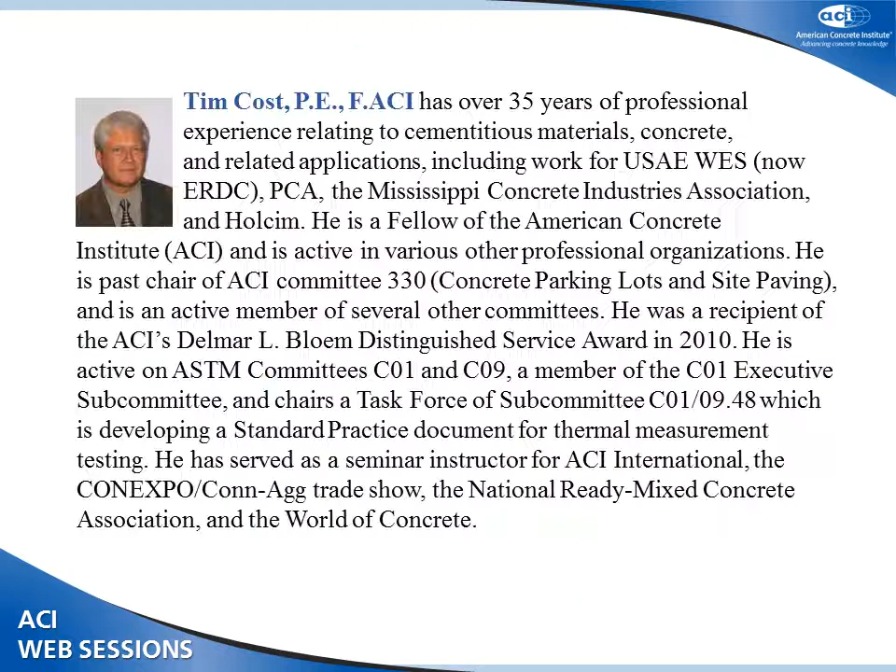With that, we'll move along to our next presenter, which is Tim Cost from Holcim. Tim, if you'll join me here on stage, and if everyone would welcome him, please. Thank you.

Well, here's some cement guy wanting to talk about chemical admixtures. This should be good.

It's true that chemical admixtures are a very important component of how we might go about developing highly sustainable concrete mixtures. I'd just like to suggest an approach that may be useful in finding the right proportions and optimizing the performance of certain types of highly sustainable concrete mixtures.

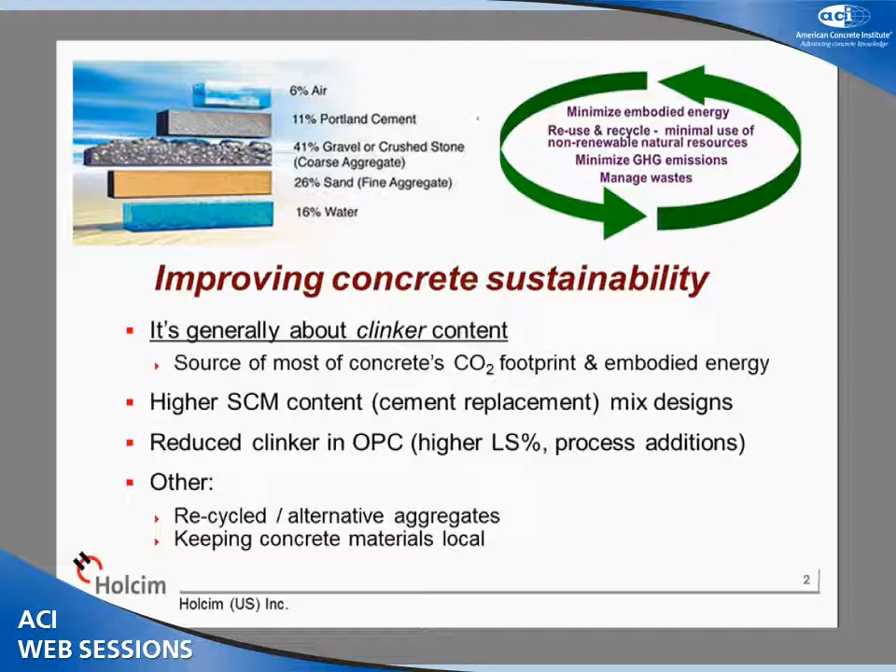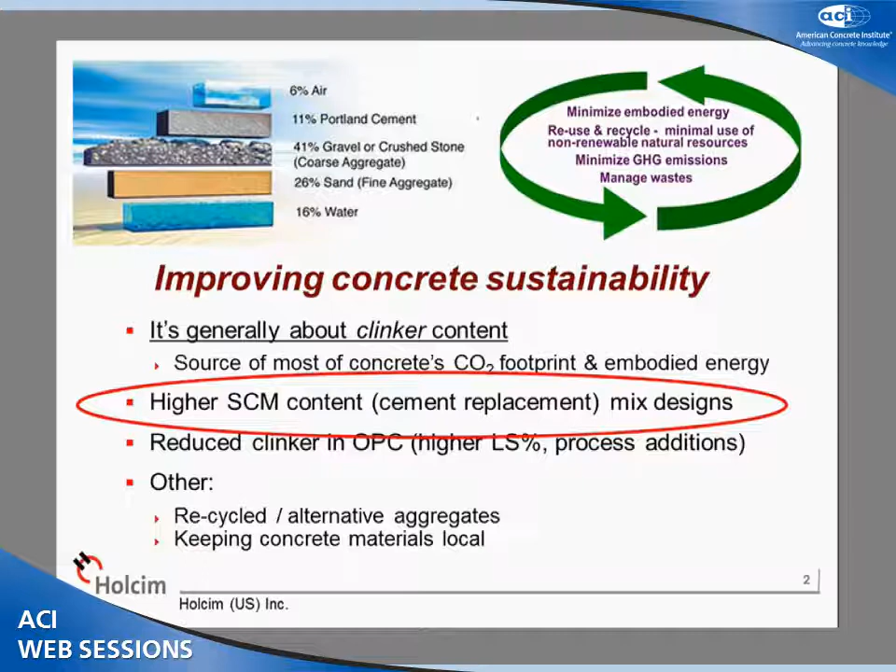When we talk about sustainability and improving the sustainability of concrete, many times it's all about reducing the clinker content of our concrete mixtures with available technologies today. As we do that, the reduction of Portland cement use through supplementary cementitious materials becomes a very important part of that. More and more, we're running into concrete specifications and even project owners who want to require of us higher replacement of ordinary Portland cement with supplementary low carbon footprint materials.

There are a number of very celebrated projects in recent history that make significant use of SCMs in concrete. The I-35 bridge in Minneapolis is certainly one such project with some very impressive numbers on replacement of Portland cement for high performance concrete. But unfortunately, not all projects are as conducive to the use of such mixtures.

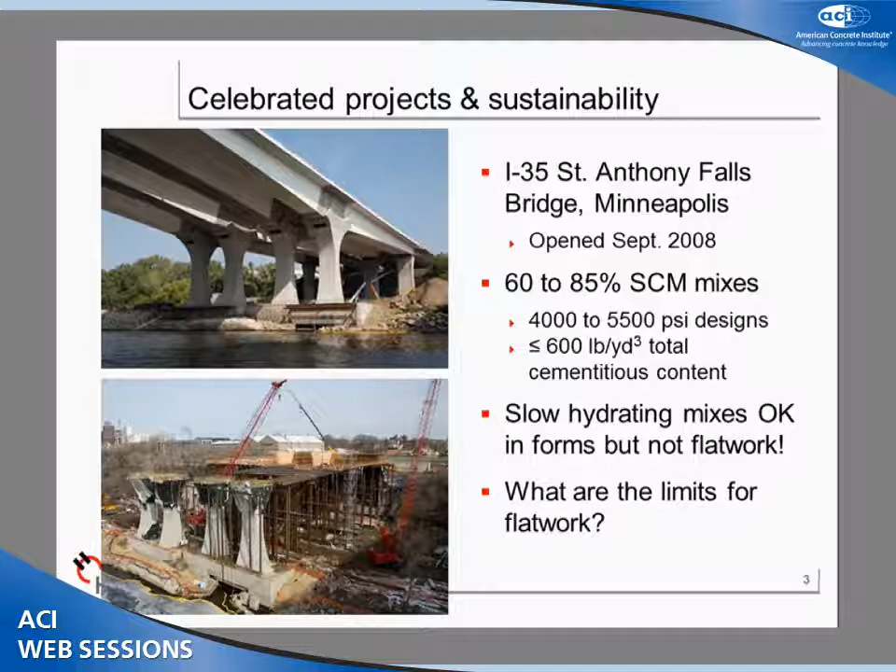In particular, projects that may require a lot of flat work. Finishing of flat work for floors and pavements and so forth require certain aspects of performance that seem to be contradictory with the use of extended levels of supplementary cement materials.

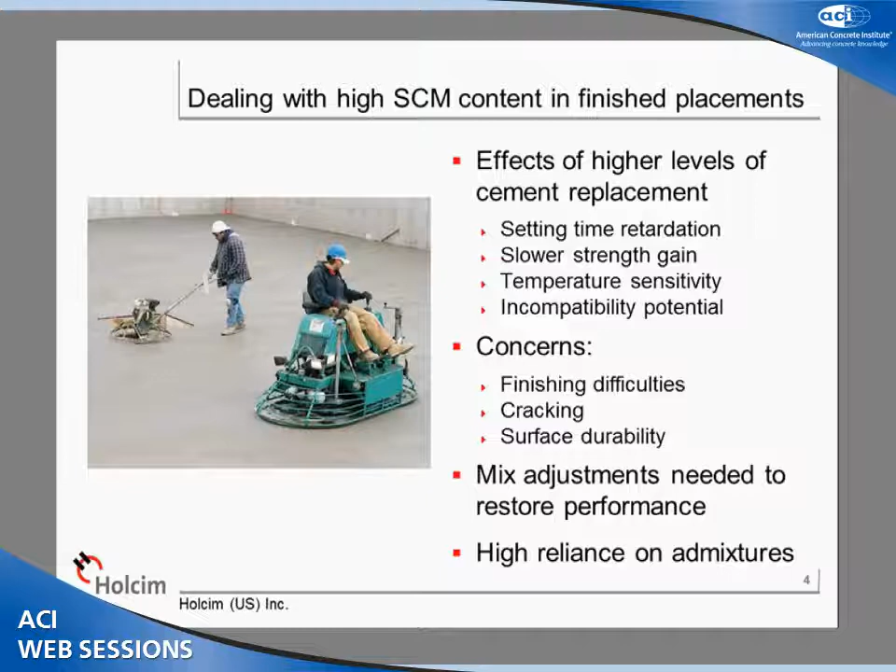And the related performance trends that are problematic are certainly set time retardation, very slow strength gain of the mixture, and so forth. And of course, the potential of problematic performance with cracking and surface durability issues becomes more and more significant as we slow hydration rates and extend setting times.

So one thing that's been found to be problematic whenever we're mandated to go to a very high level of supplementary cementitious materials is if all you do is simply increase the replacement rate of your fly ash from 25 to 50%, you're probably going to have some performance problems on your hands.

So this might be a protocol that might be of interest in the next few slides here in restoring acceptable performance. And these are the related challenges.

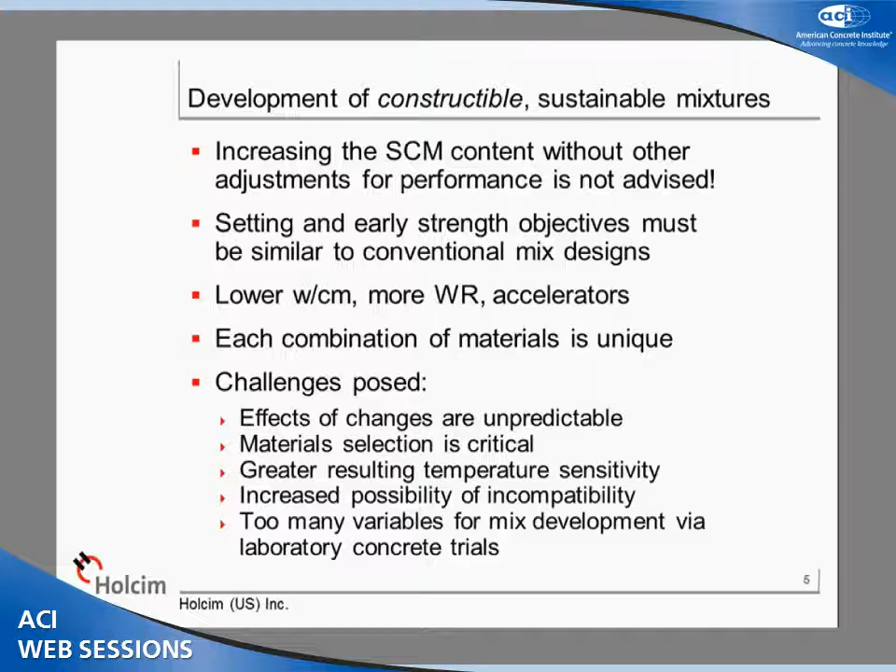As we start to use more and more chemical admixtures to accomplish certain things in our concrete mix, the complexity of this mixture becomes significant, and the predictability of those results, particularly as we change from one job to another, material-specific sources to others, we really need to be able to develop mix designs based on specific knowledge of specific material combinations.

So what I'd like to suggest is the use of what we are referring to as thermal profile testing or thermal measurement testing. It's a very expedient, quick and dirty tool for preliminary performance, achieving performance attributes of interest in a concrete mixture.

This type of process is particularly suited to evaluating setting time influences, early strength and relative hydration performance, evaluating the possibility of any potential incompatibilities, as Ara mentioned earlier, and these kinds of things.

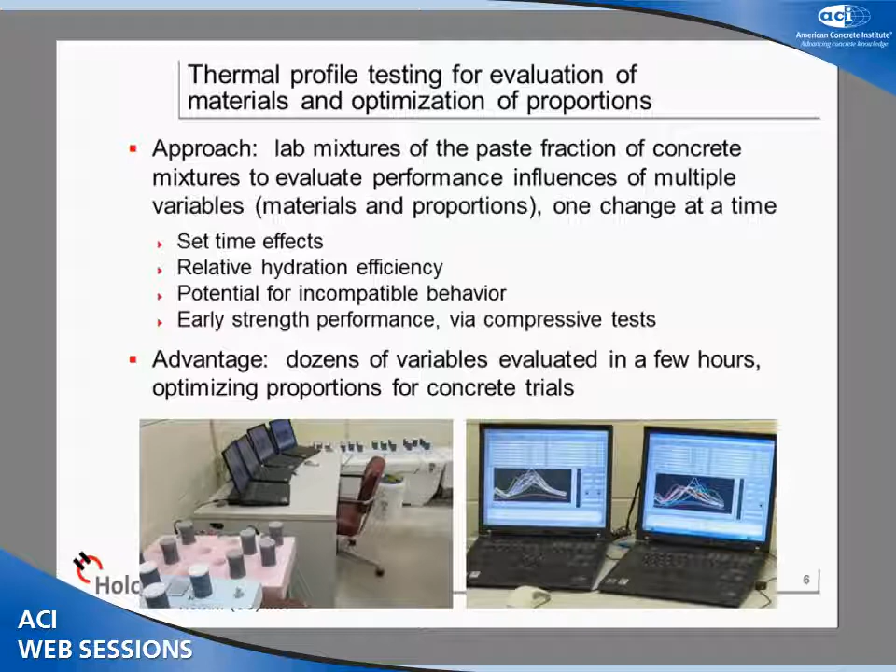Now, this type of protocol is made possible through the use of very inexpensive and easily used temperature collection devices that you can buy commercially and actually apply in various types of expediently devised setups for testing.

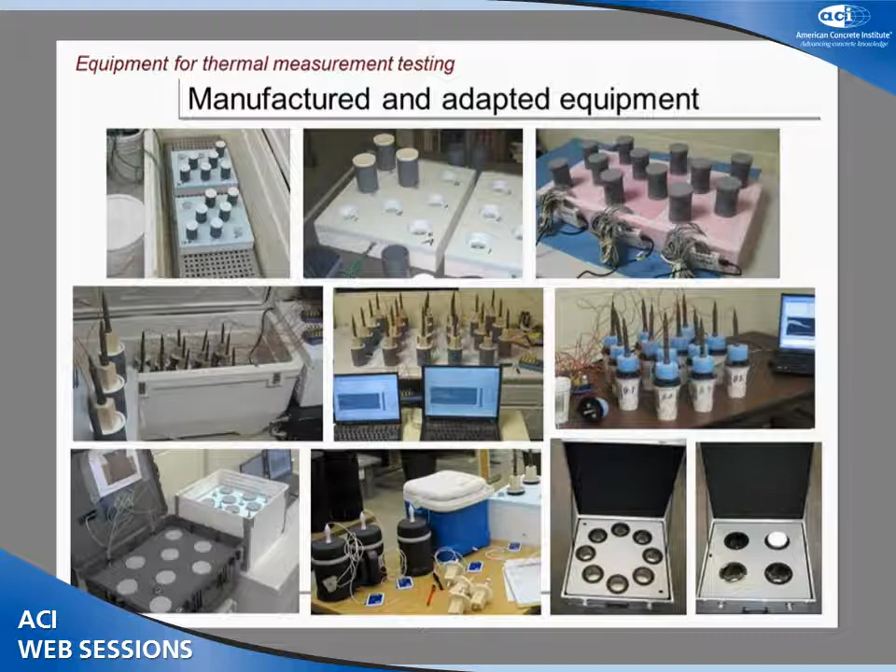There's even getting to be some commercially available thermal profile testing devices, such as the adiaCAL type field calorimeter. This is one that Holcim is now producing in Europe that is being used internally, and a variety of other adaptations. I'll show you a few more of those as we progress.

What I'd especially like to concentrate on is the use of laboratory paste mixtures. Very quick and easily executed process in which we actually model the paste-only content from your envisioned concrete mixture. No aggregates, just cementitious materials, mixed water, and chemical admixtures. This is a very convenient way to understand the effects of different chemical admixtures, their dosage rates, and their interaction with particular materials of interest.

And the equipment used is very simple and easily acquired. It's a routine thing. What we do is pre-weigh the powdered ingredients.

You see some containers, plastic containers of pre-weighed powdered ingredients. As we're doing the mixes themselves with very simple mix equipment, we're actually batching the mixed water individually for each mix and weighing that up on the fly. And we use medical syringes for the proportioning of chemical admixtures.

This also lends itself, if you're interested in investigating delayed admixture addition routines, to modifying your mix protocols. Doing this, two people can easily do 3, 4, 5 dozen mixtures in a morning. It takes us about 4.5 to 5 minutes a mix to put these up as we go, so it's very simple to do.

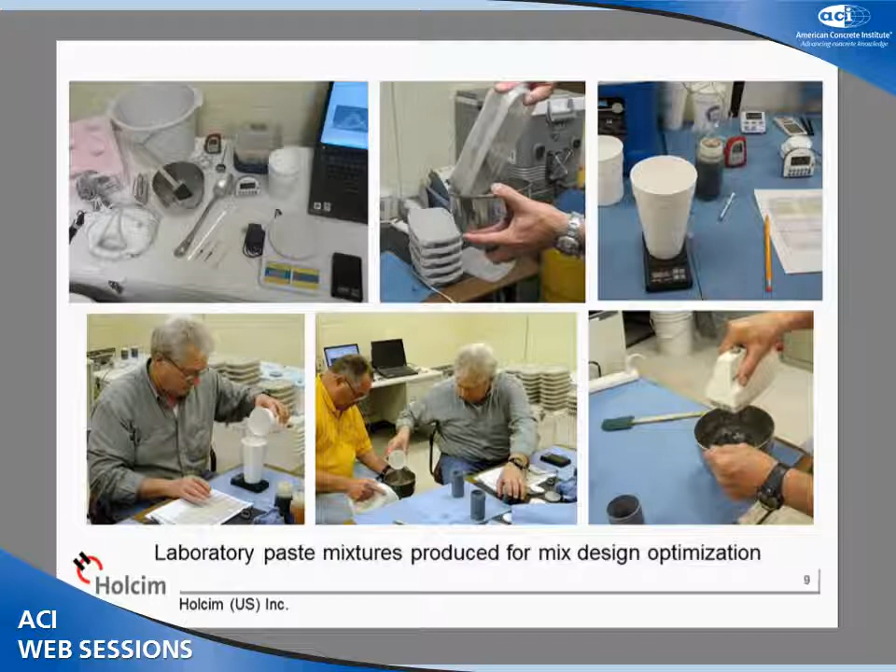These are the actual pieces of equipment that we use to produce the data that I'm about to show you. We often use a curing tank preset to a particular concrete field temperature of interest for preconditioning materials and the hydrating environment, to see what might happen at summertime temperatures in the field or even cooler temperatures associated with fall and winter.

Just a quick review of what happens in a thermal profile, in order to see how we use this information and apply it to concrete mix performance. This is a changing state of temperature of a hydrating mixture over the first 16 hours in this case, very typical.

The features we're interested in: first, the aluminates, the calcium aluminates in cement, fire off a lot of heat evolution immediately, which is then very rapidly controlled, if everything is ideal, by the interaction of calcium sulfate or gypsum in solution. That provides us the delay period for finishing concrete and so forth.

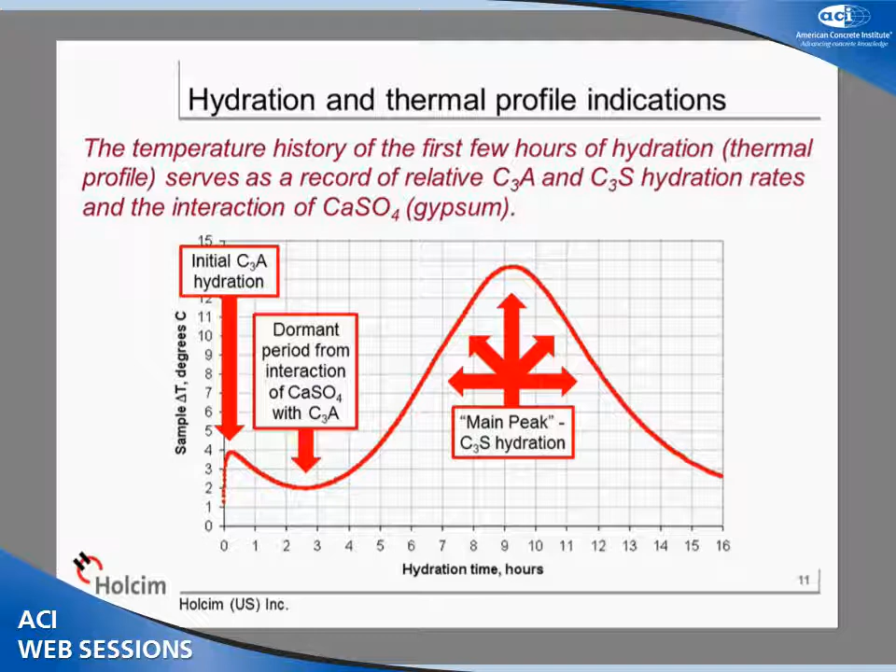Then the main event occurs, which is the calcium silicate hydration that produces setting of concrete and ultimately the early strength of concrete. We know from experience that in this history of events, the initial setting of concrete probably occurs in the neighborhood of that timing in the sequence.

This is actually quite repeatable and has been found to be a useful tool for even estimating concrete setting times from such mixtures. A convenient reference might just be a point halfway up the onset of hydration from dormant temperature to peak temperature. It can be done visually or in a spreadsheet, and we use that as a reference indicator of approximate setting time changes from one mix to the next.

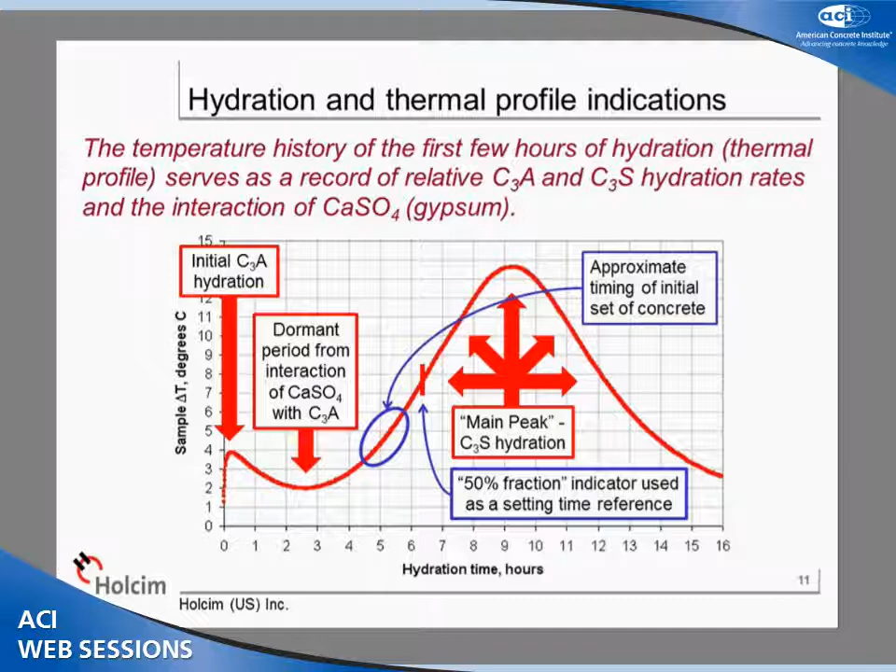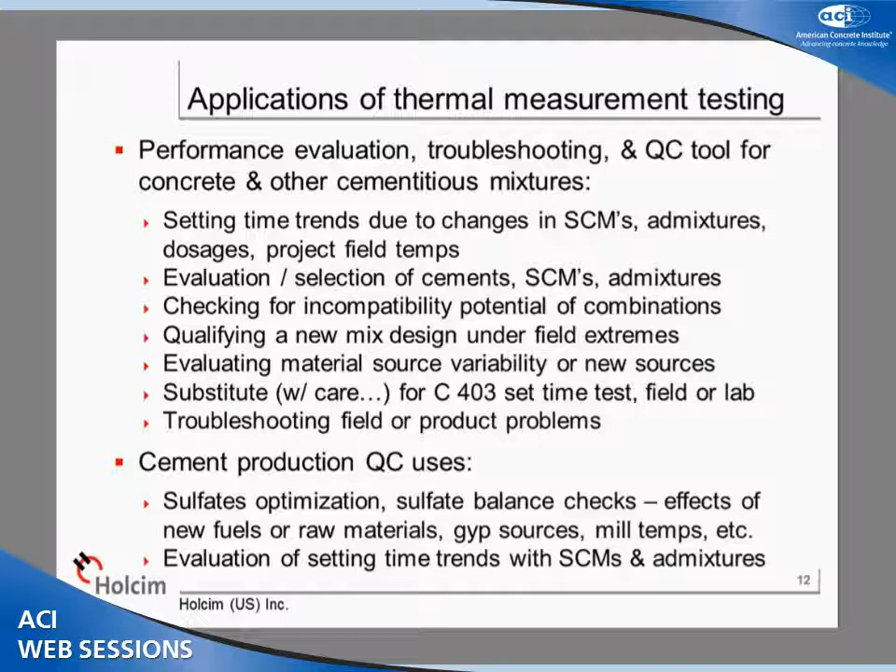A lot of different applications of this technology. The specific uses I'm going to suggest relate to how we can model a concrete mixture that is performing well, and then use the same testing techniques to investigate different proportions of other materials to reproduce that performance.

By the way, this is sometimes referred to as calorimetry, but to be clear, that's a misnomer. Actual calorimetry is the very precise measurement of actual heat evolution from a hydrating sample. We're crudely documenting the changing temperatures of mixtures as an indication of that heat evolution. But loosely, if you call this semi-adiabatic calorimetry, we'll know what you're talking about.

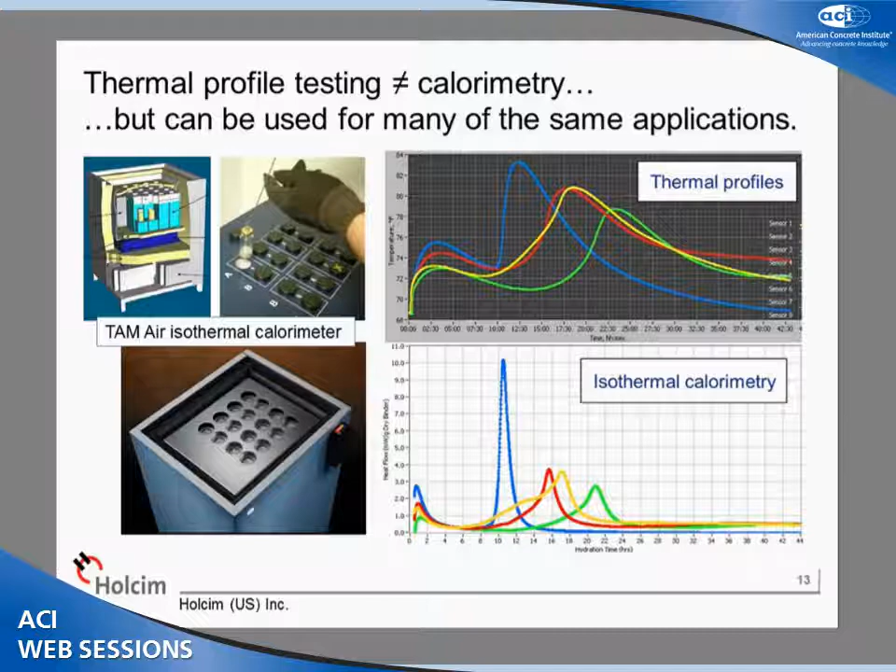Very routinely done. Another interesting thing to do is document the one-day strengths of these mixtures. In an absolute sense, the shape of this curve, while it doesn't change for a given set of materials, may actually be somewhat related to the quantity of strength produced in the evaluation period, but that's a very difficult thing to evaluate in the absolute sense.

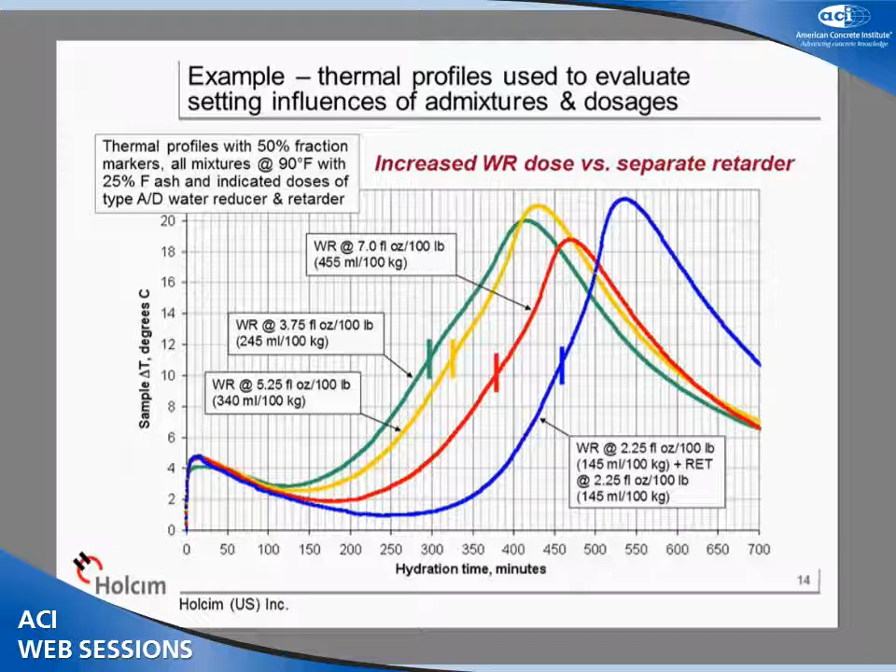So it's also very simple just to take the same hydrating samples, whether paste, mortar, or concrete, and do a one-day compression test on them to see what the relative strengths are.

The subject of incompatibility has been suggested, and this is an excellent way to investigate and evaluate the potential for a set of materials and proportions to misbehave or abnormally hydrate. We see those things happen when the shapes of the curves change, and the one-day strength documentation is particularly useful to help us assure our interpretation is correct with respect to strength generation.

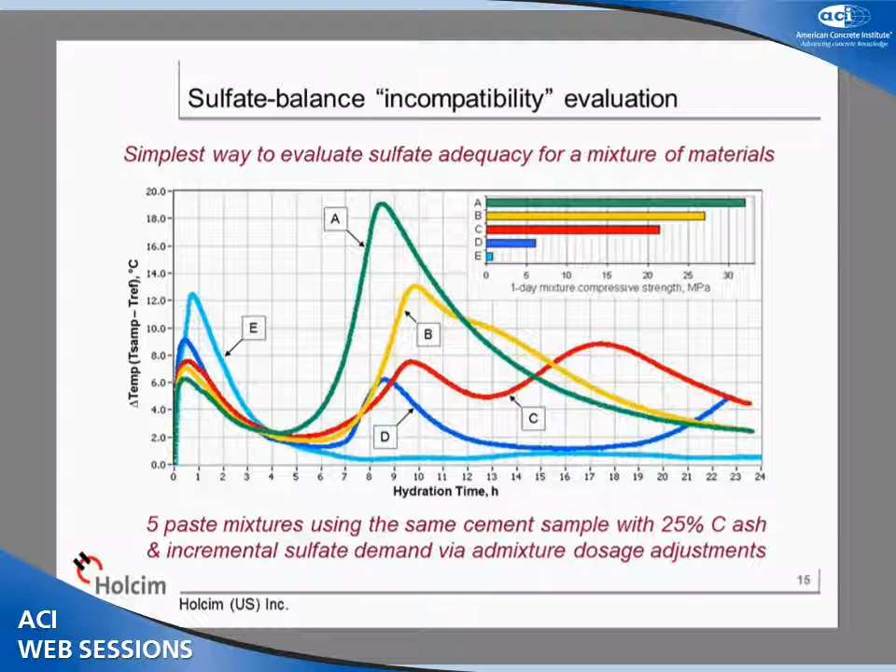This set of mixtures was exactly the same proportions and materials with the exception of admixture dose, which was incrementally changed in an aggressive mixture at summertime concrete temperatures. You can see in the case of normal hydration, the green curve, the strength produced at one day, all the way to the most extreme case for the most incompatible set of conditions, which produced virtually no measurable strength in one day and would have been a very unusual setting time trend.

These incompatibility occurrences are driven by a variety of things, but principally certain SCMs. Again, if we're developing sustainable mixes, this is of particular interest, particularly Class C fly ash, which may contain significant aluminates.

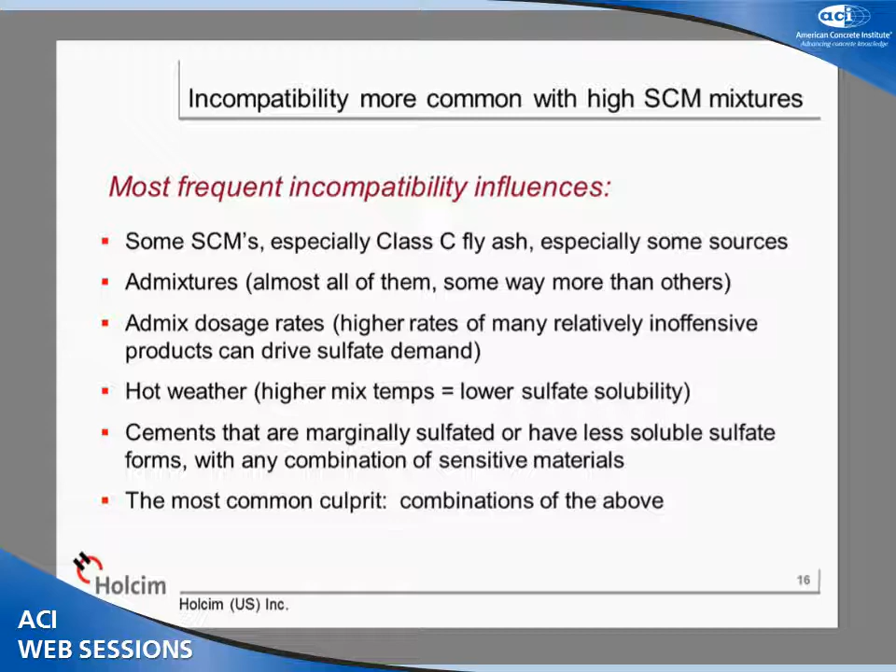Certain admixtures, almost all admixtures, have some bearing depending on the dosage rate, certain admixtures more so than others. And as we get into multiple admixtures, these questions become infinitely complex. Hot weather is another incompatibility influence because the solubility of calcium sulfate changes in an unexpected way. As temperatures get warmer, solubility actually becomes more difficult for calcium sulfate in solution. And finally, there may even be cements where the adequacy of the sulfate or gypsum content, at least in soluble forms, might be in question for very aggressive concrete mixtures. So different combinations of these things can become particularly challenging.

How we would go about using this technique to develop a highly sustainable concrete mixture - there's a variety of different approaches that could be used. I'm just going to show you an example of what you might do with some commonly available materials. What we're really trying to do is replicate the early performance, particularly setting time and early strength development, of traditional concrete mixtures that do behave adequately for flat work finishing. What we're actually going to do is take proportions from commonly used concrete mixtures and put those materials together to establish baselines for our subsequent testing with varied proportions and materials in a more sustainable type mix design.

We'll do this through initially increasing the SCM level, and then we might actually need some additional admixtures in order to reduce the water cementitious ratio for early strength development. Side effects from that may be additional retardation that needs to be compensated for with accelerating admixtures and so forth. So here's how that goes.

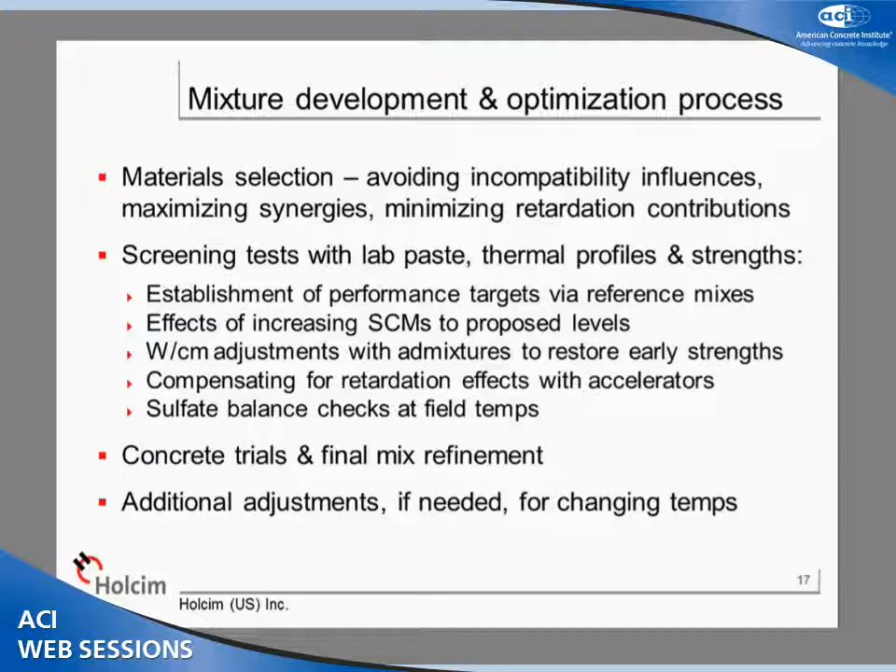First of all, just the selection of materials - there are a lot of things that can be done with this very simple testing if you have certain options for materials. A baseline mix design to model for your initial material selection process might be one that you've had experience with, one that would be particularly challenging for a set of materials to survive. Or you might just come up with your own set of complex proportions. That would be what we think of as a high sulfate demand mixture.

Here 7 different cements are compared in an otherwise identical mixture, and you see the difference in the onset of hydration that results in different setting times for that combination. In one case, we actually have a cement that completely failed the test and produced essentially no measurable one-day strength. So if you have different cements to choose from, it might behoove you to pick sample A or sample E as the faster setting cements in this combination of materials you might be dealing with.

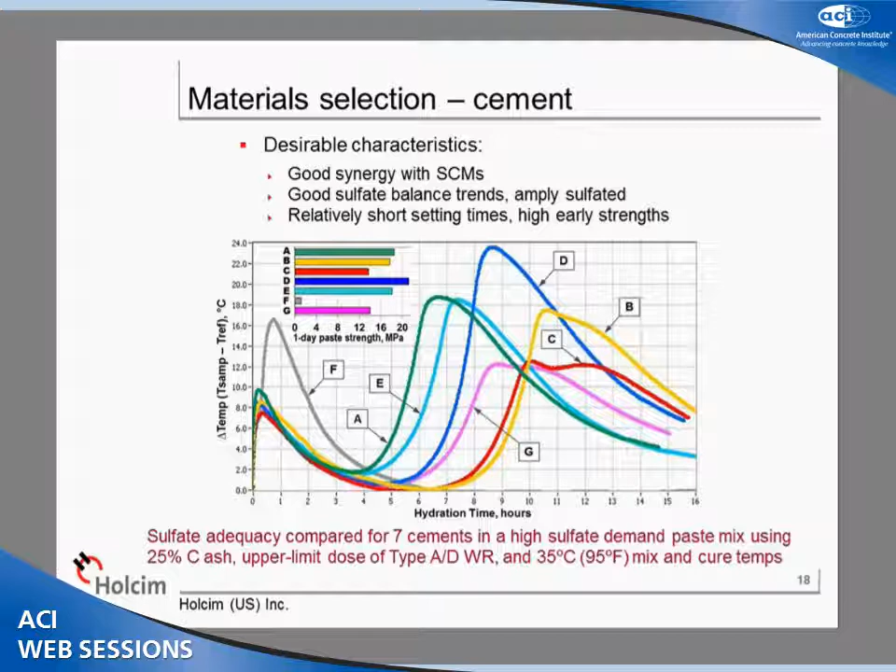Just an example - you could certainly do the same thing for your chemical admixtures. These are some comparisons of different admixtures selected for dosage rate based on about the same level of water reduction that you could accomplish. It's no surprise that the common type AD products have a lot of associated retardation - not a good selection for highly sustainable mixtures in most cases, because retardation becomes one of our problems. But even the polycarboxylates and mid-range type products have some variability in set time influences, and selecting one with the minimum amount of retardation associated with it is probably something we want to do.

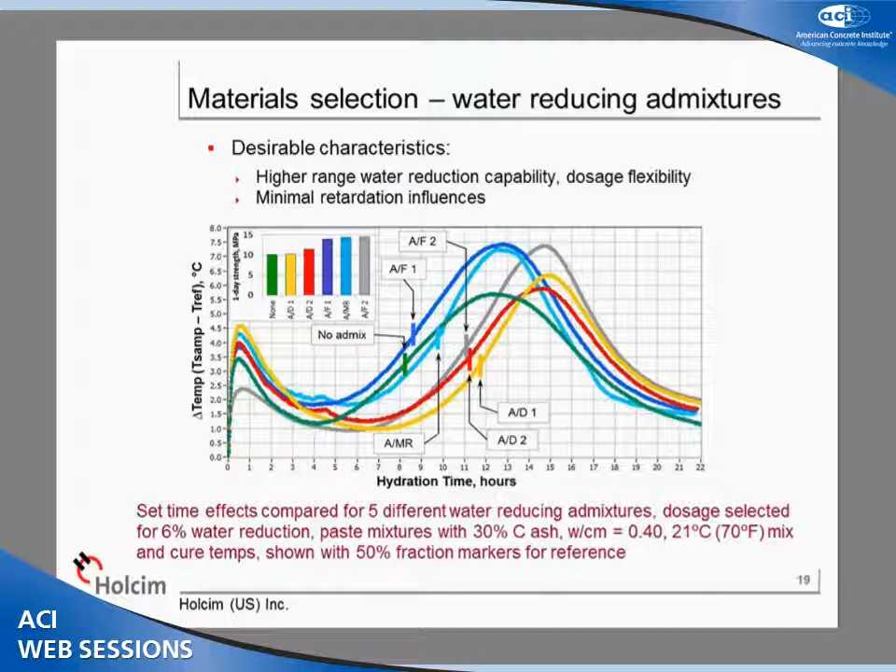Now, in the choice and selection of, and the tolerance for, the level of replacement rate of particular SCM materials, this is an ideal type of test to get a really good feel for what the performance trends of these materials is going to be, and where the sensitivity might be for maximum practical level of replacement rate given your other materials and proportions.

Here we've taken 3 different representative SCMs - a slag cement, a Class C fly ash, and a Class F fly ash - and compared them at various replacement rates in these paste mixtures in the laboratory. Very simple process - all these were done in virtually a couple of hours.

Let's start with looking at the F ash. This is a very low calcium, pure pozzolan Class F fly ash. As you go from no replacement at all, in the case of the green curve, up to 40% down here, what's really happening is pretty much just dilution of the OPC and the performance associated with that. You can see the equivalent effects on one-day strength - very little potential incompatibility of material influences from this particular source of Class F fly ash.

The slag cement down here on the bottom - slag cement's up to 50% or so common in concrete. It's really not much of a challenge most of the time.

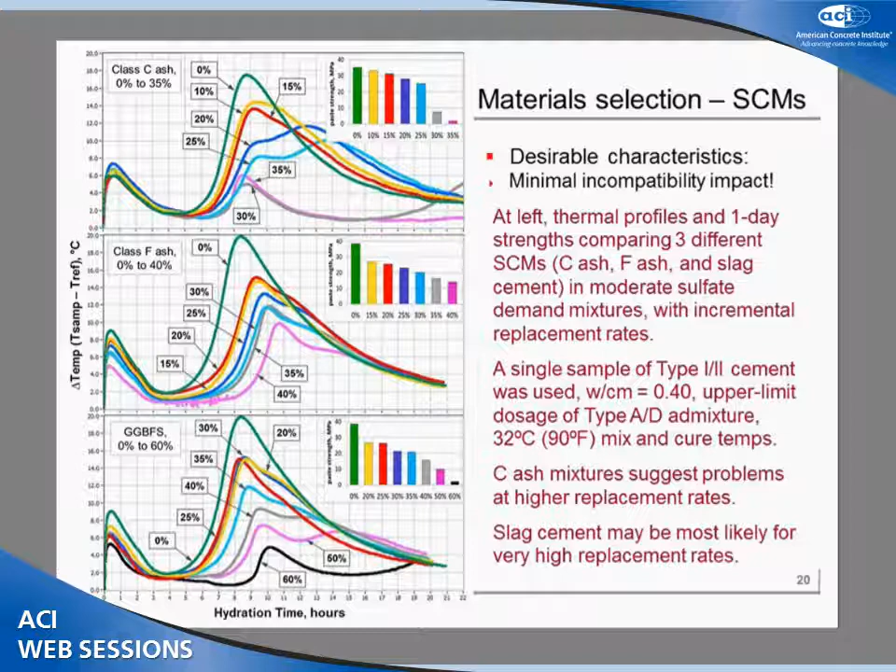That being the case, as we explore mix development, we might expect to see problems out of this material. Now here's how we would go about using this technique or approach to actually model successful mixtures and reproduce their performance in highly sustainable mixtures. These are 3 different mix designs from common concrete in the marketplace that have been modeled in paste in the laboratory, and they are the same 3 materials we've just investigated: a slag cement at about 30% replacement, an F-ash at 15%, and a C-ash at 15%.

We're establishing thermal profiles that will allow us to establish a target band, if you will—this shaded band that will give us a reference for future use in the development of a concrete mix design that will perform in a roughly equivalent fashion. Also, for the one-day strengths, we can do the same thing and come up with somewhat arbitrary, but at least a minimum strength requirement target for our one-day paste mixtures going forward.

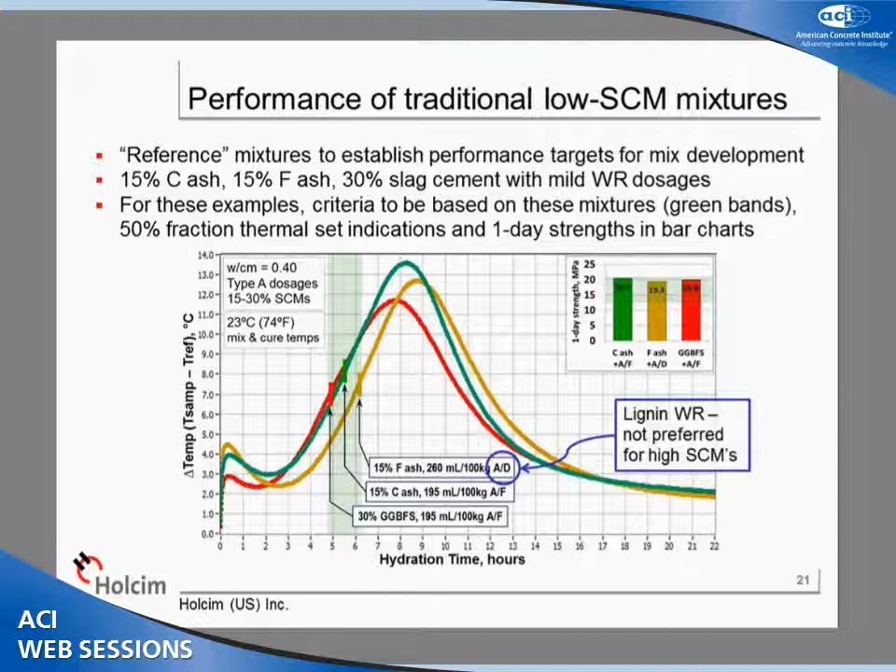I should point out that these were modeled from concrete mix designs that actually used a couple of different chemical admixtures, and the AD type admixture is one that we know is not generally preferred for highly sustainable mixtures with high cement replacement, so we'll have to deal with that going forward.

It's interesting as a next step to see just what might happen if we do nothing but go up from the 15 or 30% cement replacement to a 50% cement replacement. If our specifications are calling for a concrete mix that has only 50% ordinary Portland cement content, then this would be an interesting next step.

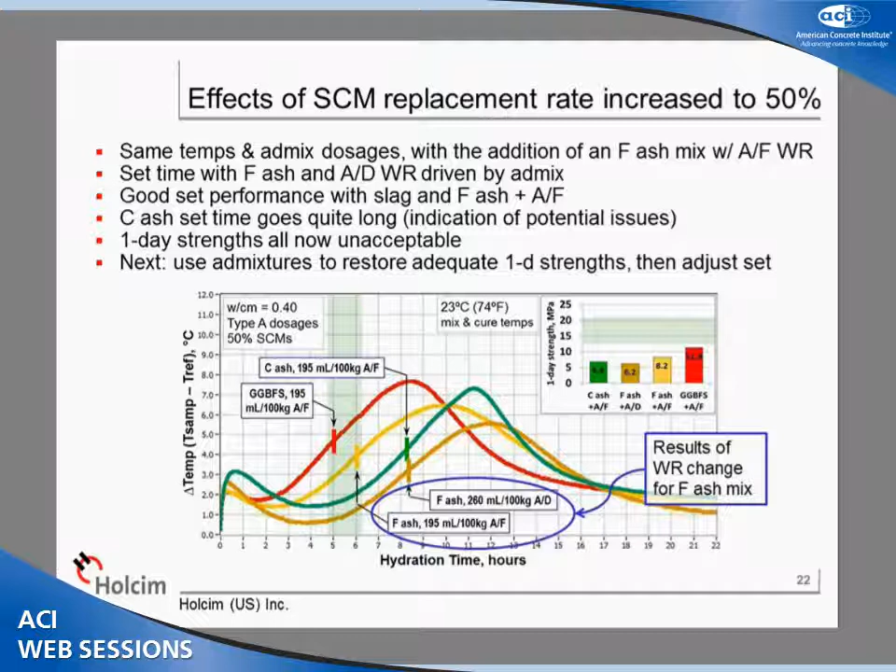But first, let's try to get our one-day strengths back in target. To do that, we're going to need to lower water cementitious ratio. Chemical admixtures are obviously the tool we need for doing that. So if we increase the dosage rate of the chemical admixtures and lower the water cementitious ratio—in this case generally from 0.4 down to about 0.32—then now we have a set of one-day strengths that are beginning to bump our target band. We'll actually improve those a little further with the use of some accelerators later on, but for argument purposes, this gets us in the zone.

Kind of interesting too that the slag cement mixture at 50%—you know, we're familiar with that—it's not even struggling yet. So just for giggles, we threw in a 60% slag cement mixture here just to see where we were. And we're still at an interesting set time comparison relative to the F-ash and C-ash, just for a point of interest.

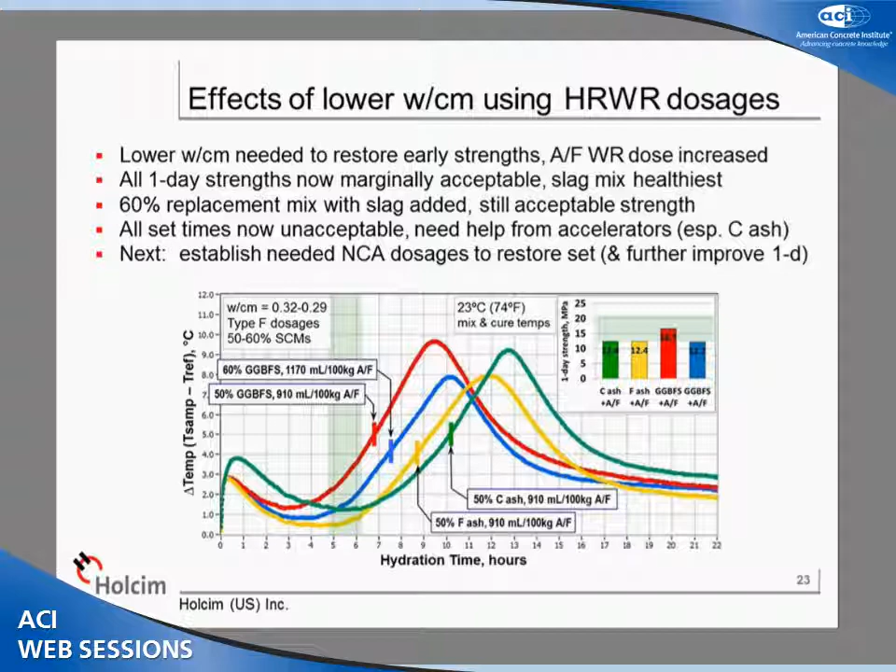Unfortunately, the chemical admixture use in this case has now retarded our mixture to a point that the setting times are no longer, any of them, in the target band. So we're going to need to accelerate this mixture for adequate performance in flat work finishing. We do that with accelerating chemical admixtures—we're going to use non-chloride accelerating admixtures in this case.

Again, we try different things. We vary the proportion of that non-chloride accelerator in replicate mixes to see where we need to be. For the F-ash mixtures, a pretty mild dosage rate—this product ranges up to about 40, if that's the language you speak in dosage rate—this would be about 10 and about 20 ounces per hundredweight. It doesn't take too much to get us in the target band, and again, this improves our one-day strengths.

The slag cement mix at 50% is already close to the target band, so it takes very little, even less than probably 10 ounces per hundredweight of that chemical admixture. Again, the one-day strengths are improved. But the C-ash is a problem child at 50%.

Even a maximum dose of this non-chloride accelerator doesn't quite get us in the band for target set times, and now we see some incompatibility occurring, or we suspect that's what's occurring. To support that, our one-day strengths are not improving as we go to higher dosages of the chemical admixture accelerator.

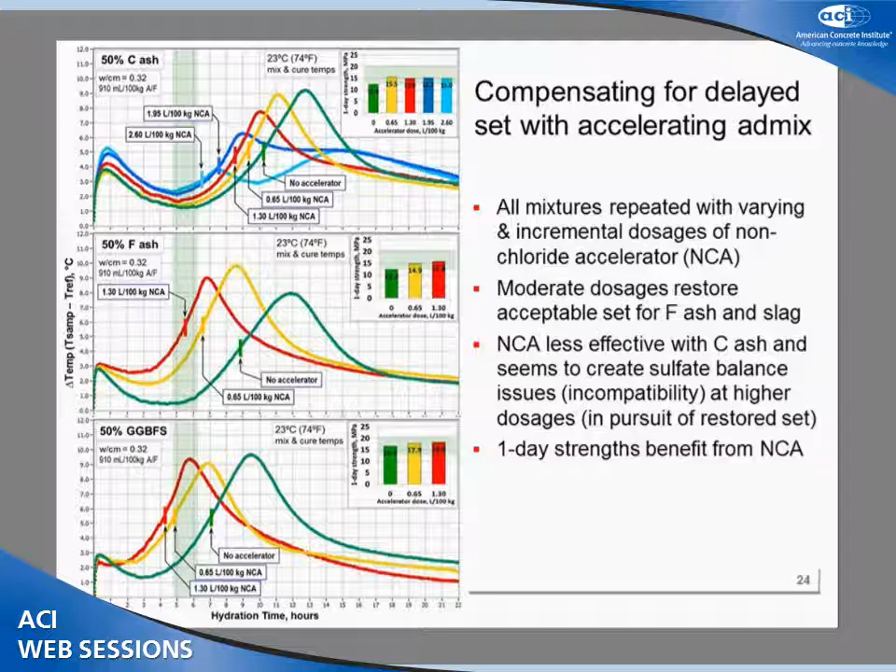To confirm this, if you're interested in doing this, it's very simple, just reproduce one of those mixtures with incrementally higher doses of a separate calcium sulfate addition. This can be ground source gypsum, laboratory grade Terra Alba gypsum, or even plaster of Paris from your local hardware store. And sure enough, as you increase the SO3 level of the mixture, we restore normal shapes. We show much improved one-day strengths, confirming that we had an incompatibility sulfate balance problem.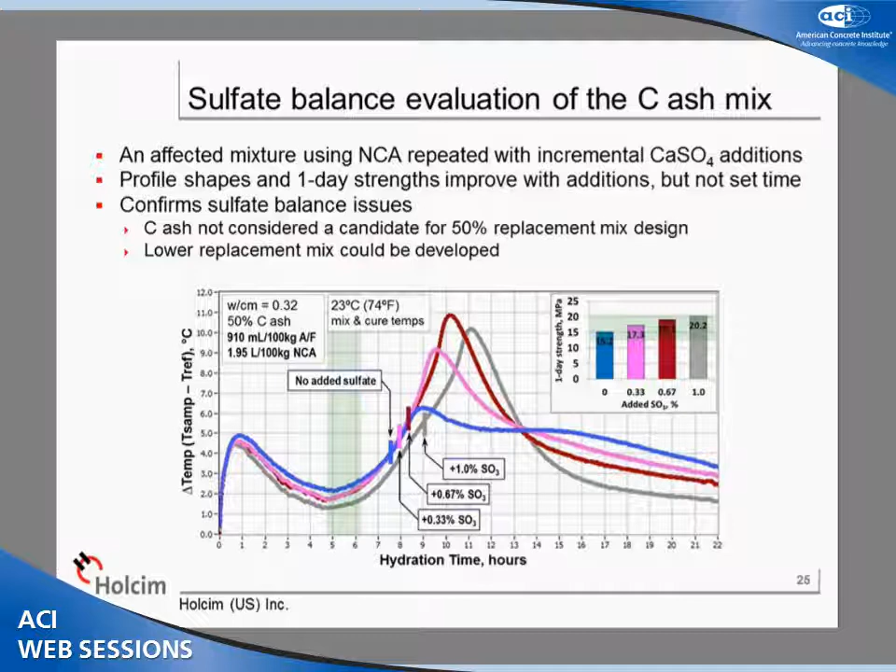Now, you can't do this in concrete, you don't want to try that. So what we've got is a situation where we can now rule out the Class C fly ash if we need to go to a 50% replacement level in this mixture. You might be able to use 40%. You'd have to start over and try that again.

The final thing to do in the sequence of events is to check and see if you're still going to be okay at your highest envisioned field temperatures in concrete. So we've bumped our mix and cure temperatures up to, in this case, about 96 degrees Fahrenheit. We've reinvestigated the F-ash and the slag mixes, which of course are actually setting faster now. We could even reduce the non-chloride accelerator dosage. The one-day strengths are now ample.

So this is just a process suggestion, but you see how simple this is to do many different replications of combinations that will be necessary to investigate in your process.

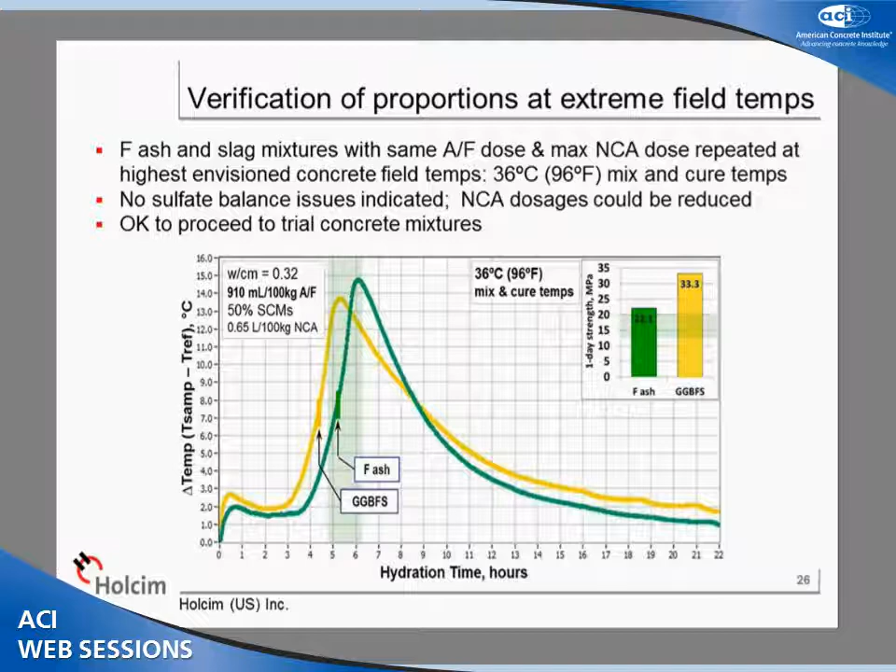And just to show you the example of why it's important to model the temperature ranges you would expect to see in the concrete field, here's 4 different mixtures with different sets of materials and admixtures: one straight cement, one 25% C-ash, one with the ash plus a nominal dose of a lignosulfonate, and then with an extreme or high-range dose of a lignosulfonate.

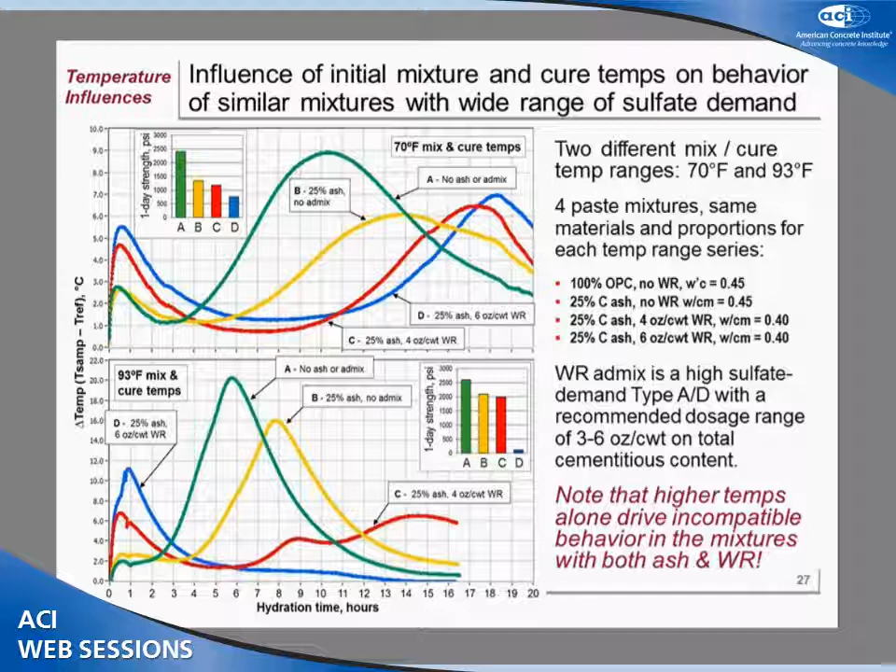All of these are still performing normally, one-day strengths at laboratory temperatures, but at 93 degrees Fahrenheit, the mixture with the highest dosage of admixture is now in complete incompatible behavior. So temperature alone can drive whether or not this is a problematic occurrence.

So in summary, this is just a suggested example of how you might, through this process, define some materials that work and some proportions that probably replicate acceptable early performance in your mix design. It's now time to take this mixture to the field or laboratory and put up actual concrete to verify your preliminary proportions. You might have to do some additional fine-tuning of the mix for finishability, for bleed water effects, whatever it might be. But now you have a general guideline for what the limits are of the materials and proportions to get into this very sustainable mix design realm.

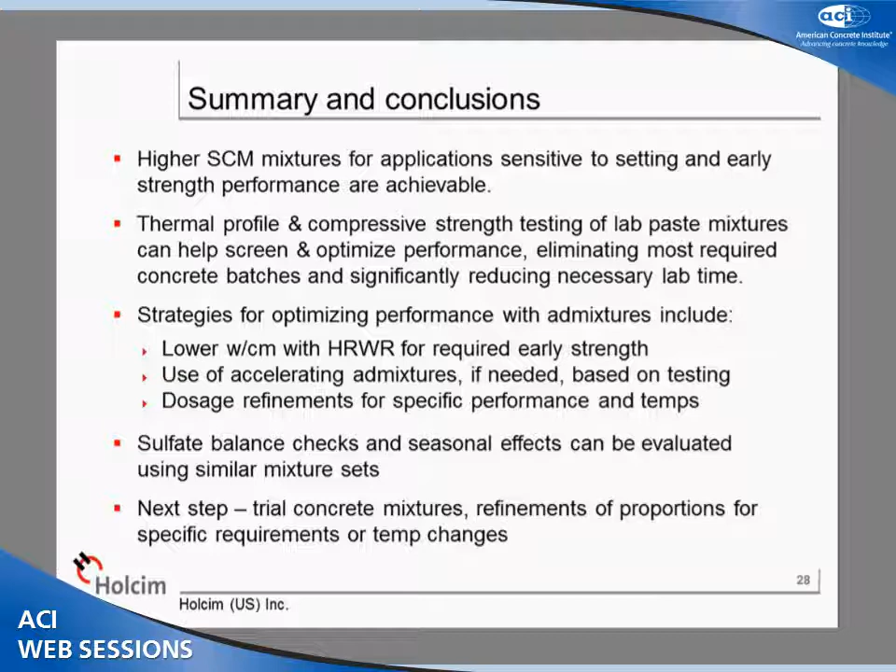And the same techniques are very useful in remedying any potentially problematic behavior that you might encounter on the job by taking the materials back to the laboratory and doing a quick investigation. So with that, I would be glad to try to address any question.

Thank you, very good question. The device that we use, and this would be best accomplished with a more sophisticated laboratory curing cabinet that you could set at material temperatures, curing temperatures of interest.

We're using, for simplicity, a programmable curing tank, the same type of tank that you might use on a job site or in a construction trailer for curing concrete cylinders, where you can actually set the temperature on the curing tank all the way from somewhere in the neighborhood of 40 degrees Fahrenheit up to maybe 140 degrees Fahrenheit. It's got a water bath in the bottom and then a table above the water bath, which is the environment of interest for the curing samples.

Now, we actually also precondition the materials prior to mixing to that same temperature to simplify data evaluation, but we use that curing tank. It's not perfect in that there's a little bit of temperature fluctuation, but you can get very, very close to what you're after with that simple piece of equipment. Thank you, Tim.